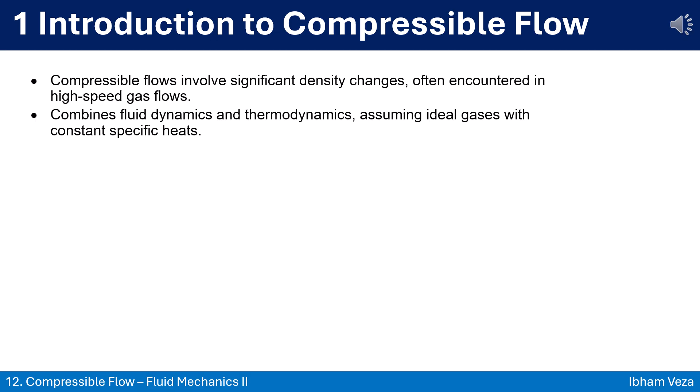2. Key concepts in compressible flow behavior. Before we go deeper into compressible flow behavior, we must understand stagnation properties because they serve as reference points in high-speed flow analysis. Stagnation means the condition a fluid would reach if brought to rest isentropically, meaning without heat or work interaction and with no friction losses.

Let's begin with stagnation enthalpy, defined as the sum of static enthalpy and kinetic energy. h0 = h + V²/2. This equation tells us how the energy of motion is converted into thermal energy as the flow decelerates. In adiabatic flow, without work input or output, this stagnation enthalpy remains constant.

From that, we derive stagnation temperature. If we slow down the flow adiabatically to zero velocity, the kinetic energy turns into internal energy, increasing the temperature. That gives us T0 = T + V²/(2Cp). This relation becomes crucial in applications like nozzles, diffusers, and turbomachinery.

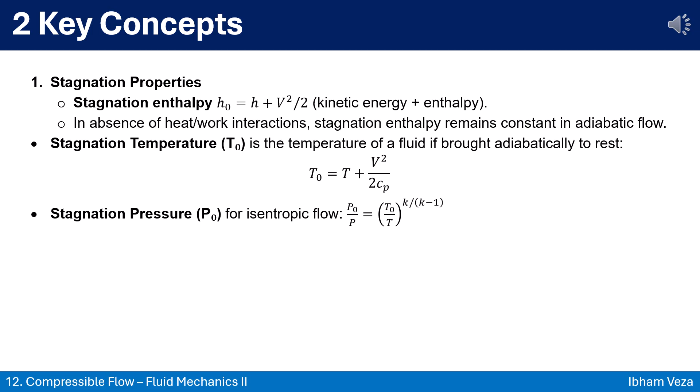Together, these stagnation properties act like anchors, tying thermodynamic and fluid dynamic properties together. Mastering them allows you to confidently analyze everything from jet engines to high-speed wind tunnels.

3. One-dimensional isentropic flow. Let's now focus on the foundation of high-speed gas dynamics, one-dimensional isentropic flow. This is where we analyze compressible flow, assuming no heat transfer, no friction, and constant area or smoothly varying geometry. The flow remains reversible and adiabatic, perfect for understanding ideal performance limits.

To begin, we define the speed of sound in an ideal gas. It is the rate at which pressure disturbances travel, and it depends on the thermodynamic state of the gas. The formula is c = √(kRT), where k is the specific heat ratio, R is the gas constant, and T is the absolute temperature. This means the speed of sound increases with temperature and depends on the molecular characteristics of the gas.

Next comes one of the most essential non-dimensional parameters in compressible flow, the Mach number. Defined as the ratio of flow velocity to speed of sound, Ma = V/c. This simple-looking ratio changes everything. When Mach is less than 1, the flow is subsonic. When Mach equals 1, it's sonic. And when Mach is greater than 1, the flow is supersonic.

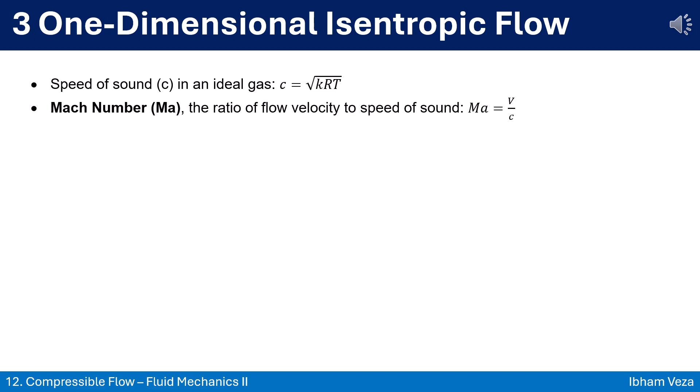4. Flow through nozzles. To understand how compressible flow behaves in practical systems, we must study nozzles, devices that control and accelerate gas flows using area change. There are two key types of nozzles, converging and converging-diverging, and each serves a different purpose depending on the desired flow regime. Let's begin with the converging nozzle. As gas flows through a narrowing cross-section, its velocity increases while pressure drops. However, there is a limit.

When the flow reaches Mach 1, also known as sonic conditions, the nozzle becomes choked. Beyond this point, increasing downstream suction or lowering exit pressure will not increase mass flow rate. It's as if the nozzle reaches a traffic jam of molecules, maximum mass flow, but no more speed increase. You simply cannot go supersonic with a converging nozzle alone.

To go beyond Mach 1, we need a converging-diverging nozzle, also known as a Laval nozzle. In this design, the flow accelerates to Mach 1 at the throat, the narrowest part of the nozzle, and then continues to accelerate into the supersonic regime in the diverging section. At subsonic speeds, flow accelerates in converging sections and decelerates in diverging ones. But once the flow passes the throat and becomes supersonic, everything flips. Now the flow accelerates in the diverging part, and pressure and temperature continue to drop.

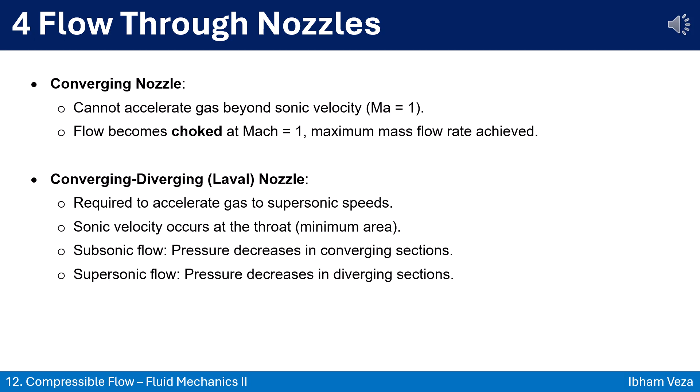5. Shock waves. When a compressible flow encounters abrupt changes, either due to geometry, pressure differences, or directional turns, the result can be a shock wave. Unlike gradual pressure waves, shock waves are sudden, intense, and irreversible. They mark a sharp boundary in the flow field where fluid properties jump almost instantly.

Let's begin with normal shocks. These shocks stand perpendicular to the flow and occur when a supersonic stream is forced to decelerate to subsonic speeds. Across the shock, velocity drops dramatically, while pressure, temperature, and density increase. Entropy rises as well, making the process irreversible. Interestingly, although static properties increase, the stagnation pressure drops due to the irreversible nature of the shock.

Oblique shocks are a more general case where the shock wave forms at an angle to the flow direction. These are characterized by two key angles, the shock angle, beta, and the flow turning angle, theta. Depending on the conditions, the oblique shock can be weak or strong. Weak shocks are usually desired because they cause smaller losses. Strong shocks bring larger property changes, but higher losses. After passing through an oblique shock, the flow might still be supersonic or may become subsonic.

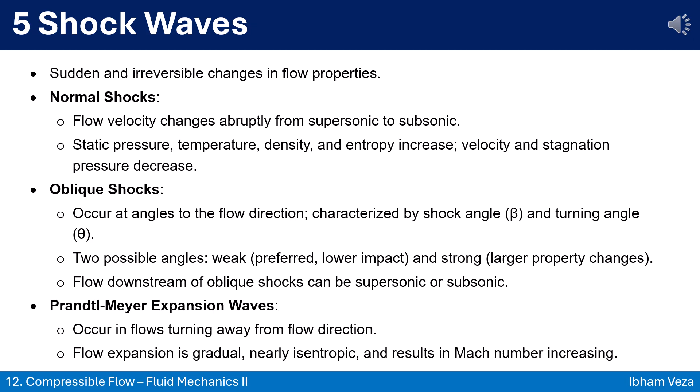6. Rayleigh flow. Rayleigh flow is a model that describes compressible flow in a steady, one-dimensional, constant area duct where heat transfer occurs but friction is absent. This idealization is especially useful for analyzing combustion chambers, afterburners, and any device where heat is added or removed from a high-speed gas stream. As heat is added to the flow, the stagnation temperature and enthalpy increase. If the flow is cooled instead, these properties decrease.

However, the effects of heat addition differ depending on whether the flow is subsonic or supersonic. In subsonic flow, adding heat increases both velocity and Mach number. The fluid accelerates, and as a result, density and static pressure fall. This behavior can be counterintuitive. Adding energy to the flow causes the gas to expand and speed up.

In contrast, for supersonic flow, the opposite occurs. Adding heat actually decelerates the flow. Velocity and Mach number drop, while density and pressure rise. This is because the energy added increases random motion, temperature, more than directed motion, velocity, effectively slowing the supersonic stream.

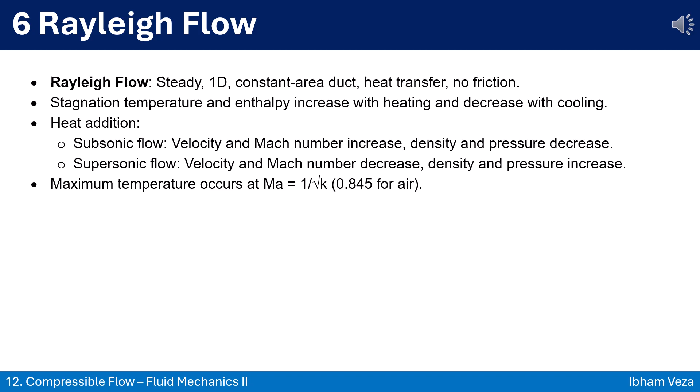Rayleigh flow is a powerful tool for understanding thermal effects in propulsion systems. Whether you're analyzing jet combustion or cooling stages in hypersonic vehicles, this model helps predict how heat shapes velocity, pressure, and flow regime. 7. Fanno flow.

Fanno flow is the compressible flow model for situations where friction is present but there is no heat transfer. This makes it an adiabatic flow with internal irreversibility due to wall shear, common in gas flow through rough or long ducts like ventilation systems or engine intake lines. The key difference from Rayleigh flow is the role of friction instead of thermal energy.

In Fanno flow, the friction affects velocity, pressure, and Mach number, but the stagnation temperature remains constant throughout the duct. However, the stagnation pressure steadily decreases because friction dissipates mechanical energy into internal energy, increasing entropy.

In subsonic flow, friction has a counterintuitive effect. It accelerates the gas. As friction extracts energy, pressure and temperature fall, but the flow speeds up and the Mach number rises. Eventually, the Mach number approaches 1, where the flow becomes choked. No further acceleration is possible despite continued friction. In contrast, when starting with supersonic flow, friction slows it down.

The Mach number decreases, and temperature and pressure rise. Again, the process moves toward Mach 1. Regardless of starting condition, Fanno flow evolves toward a choked condition where Ma equals 1, and that's the natural limit of flow rate for a given duct and friction level.

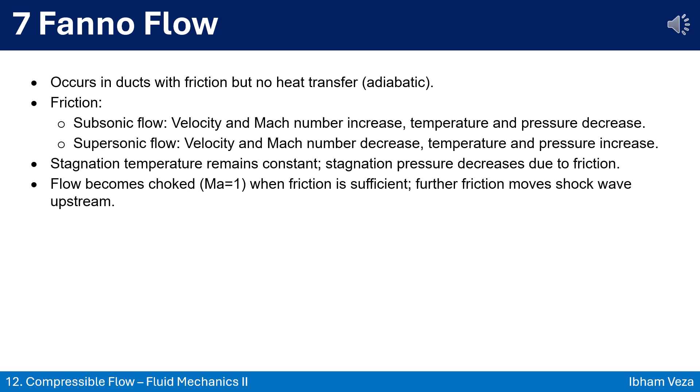Once the flow becomes choked, any additional friction shifts the location of the shock wave upstream if one forms. This principle is used in analyzing shock boundary layer interactions and understanding how flow adjusts in real pipes and gas delivery systems. Fanno flow reminds us that even without adding heat, flow properties can change dramatically purely due to the roughness of the path the fluid takes.

8. Property relations. Compressible flow is rich with interconnected variables: Mach number, pressure, temperature, density, and area, all shifting together as the flow evolves. To make sense of this complexity, engineers rely on established property relations that define how these variables behave in different regimes of flow. These relations are not guesses. They come from analytical derivations based on conservation laws, thermodynamic principles, and ideal gas behavior.

For isentropic flows, we have elegant equations that show how area ratios relate to Mach number and how pressure and temperature drop as the flow accelerates. For shock waves, both normal and oblique, the relations help us quantify sudden jumps in properties. Across a shock, you can precisely calculate the downstream Mach number, pressure rise, density jump, and entropy increase. Rayleigh flow introduces heat transfer, and we track how adding or removing heat affects velocity, temperature, and pressure, depending on whether the flow is subsonic or supersonic.

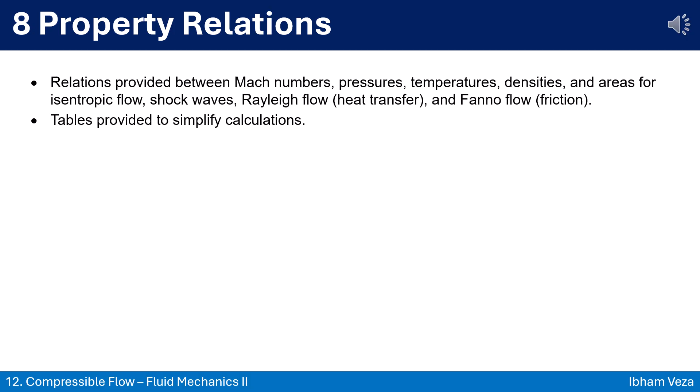Fanno flow, driven by friction, gives us different property changes. Here, Mach number evolves toward unity, and pressure losses are inevitable. These relations can be expressed through formulas, but more often they're presented in ready-to-use tables. These tables, whether for isentropic ratios, shock properties, or Rayleigh and Fanno flow, make analysis practical and efficient, especially when dealing with design or quick estimates. In applied fluid mechanics, you don't memorize all the equations. You understand the behavior, then use property tables to find exact numbers. That's how theory becomes a tool for design.

9. Choking phenomena. Choking is one of the most important and unintuitive behaviors in compressible flow. It defines the limit beyond which no increase in driving force, be it heat addition, pressure difference, or friction, can increase the mass flow rate. Once the flow reaches sonic speed, the system becomes choked and cannot accommodate any more flow without major structural or condition changes. In Rayleigh flow, which involves heat addition in a constant area duct, the choking phenomenon occurs when the Mach number reaches 1. If you continue to add heat beyond this point, the flow cannot accelerate further. In fact, the additional energy causes instability and a reduction in mass flow rate. The system has reached its thermal flow limit, and the flow becomes choked due to heating.

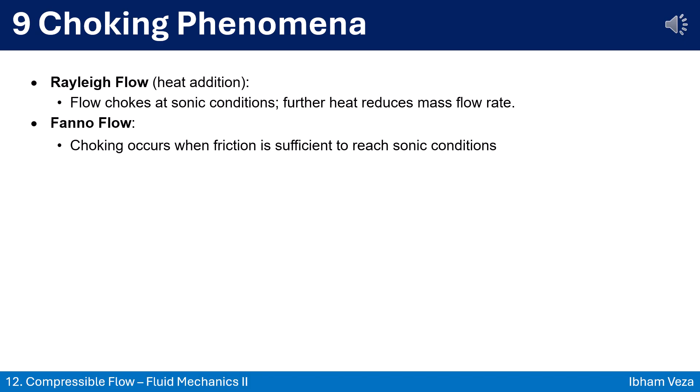In Fanno flow, where the limiting factor is friction in an adiabatic duct, a similar condition arises. As the flow progresses along a rough duct, friction causes pressure to drop and Mach number to rise in subsonic flow, or the reverse in supersonic flow. Eventually, the flow will reach Mach 1 regardless of the starting condition. At that point, it is also choked. Any additional friction does not change the mass flow, but pushes the flow toward greater entropy and moves shock waves upstream if they exist. Choking is not just a boundary, it is a control mechanism. Engineers use this property to design systems with predictable flow rates, such as nozzles, diffusers, and gas lines. Whether it arises from heat or friction, choking imposes a hard ceiling on what your system can deliver unless the upstream or downstream conditions are fundamentally altered.

Now, consider the opposite, supersonic heat addition. Here, heat slows the flow down. Velocity and Mach number decrease, while pressure, temperature, and density all rise. Entropy increases again, and stagnation pressure drops, just like in the subsonic case. Stagnation temperature still increases because energy is being added. In Fanno flow with subsonic entry, friction causes the flow to accelerate. Velocity and Mach number increase, while temperature, pressure, and density decrease. Entropy still rises, and stagnation pressure falls due to frictional losses. However, stagnation temperature remains constant because the process is adiabatic.